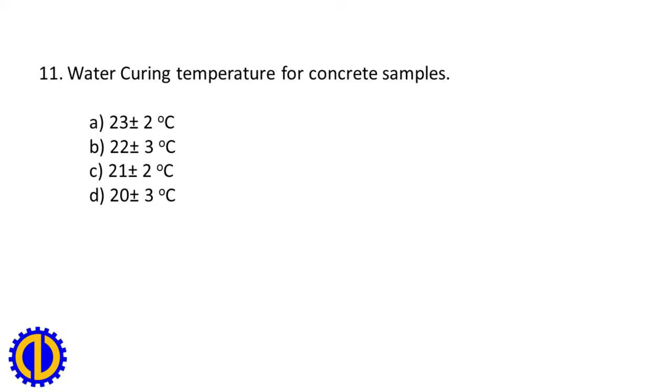11. Water curing temperature for concrete samples. A. 23 ± 2 degrees Celsius. B. 22 ± 3 degrees Celsius. C. 21 ± 2 degrees Celsius. D. 20 ± 3 degrees Celsius. Answer: A. 23 ± 2 degrees Celsius. Reference, AASHTO T23.

12. Condition of concrete during compression test. A. Dry. B. Moist. C. Wet. D. Any of the above. Answer: B. Moist. Reference, AASHTO T22.

13. Specimen tested at 28 days shall be broken within the permissible time tolerance of blank. A. 8 hours. B. 12 hours. C. 20 hours. D. 24 hours. Answer: C. 20 hours. Reference, AASHTO T22.

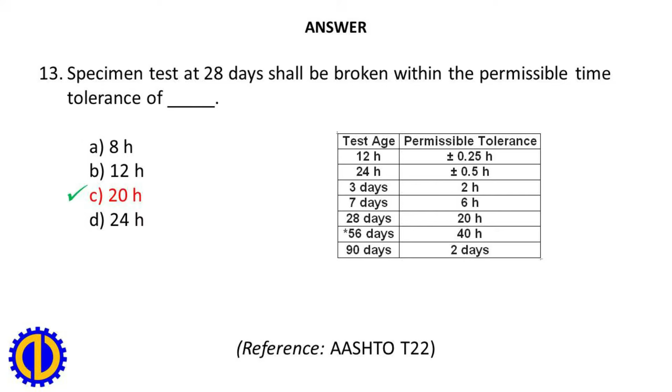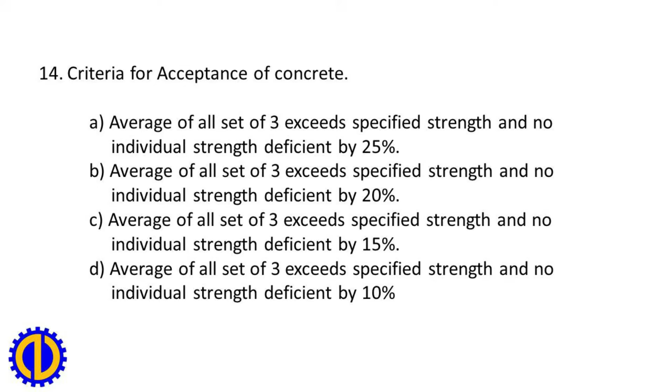14. Criteria for acceptance of concrete. A. Average of all sets of 3 exceeds specified strength and no individual strength deficient by 25%. B. By 20%. C. By 15%. D. By 10%. Answer: C. Average of all sets of 3 exceeds specified strength and no individual strength deficient by 15%. Reference, Blue Book 2013, Item 311.3.20.

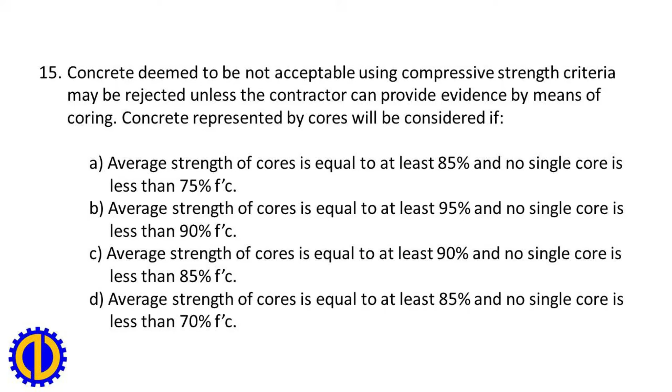15. Concrete deemed to be not acceptable using compressive strength criteria may be rejected unless the contractor can provide evidence by means of coring. Concrete represented by cores will be considered if: A. Average strength of cores is equal to at least 85% and no single core is less than 75% f'c. B. At least 95% and no single core less than 90% f'c. C. At least 90% and no single core less than 85% f'c. D. At least 85% and no single core less than 70% f'c. Answer: A. Average strength of cores is equal to at least 85% and no single core is less than 75% f'c. Reference, Blue Book 2013, Item 311.3.20.

16. Truck mixer mixing speed shall be within blank. A. 4 to 6 revolutions per minute. B. 3 to 6 revolutions per minute. C. 2 to 6 revolutions per minute. D. 3 to 5 revolutions per minute. Answer: A. 4 to 6 revolutions per minute. Reference, Blue Book 2013, Item 405.4.4.

17. Maximum drop height of placing concrete mixture shall be blank. A. 1 meter. B. 1.5 meters. C. 2 meters. D. 3 meters. Answer: B. 1.5 meters. Reference, Simplified Construction Handbook, DPWH 2014.

18. Pre-stressed concrete requires the use of class blank concrete. A. C. B. P. C. B. D. A.

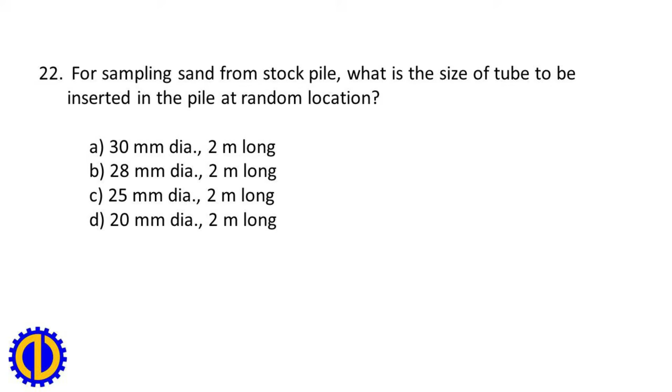22. For sampling sand from stockpile, what is the size of tube to be inserted in the pile at random location? A, 30 mm diameter, 2 meters long. B, 28 mm diameter, 2 meters long. C, 25 mm diameter, 2 meters long. D, 20 mm diameter, 2 meters long. Answer: A, 30 mm diameter, 2 meters long. Reference, AASHTO T2: approximately 30 mm minimum diameter by 2 meters minimum length may be inserted at minimum 5 increments.

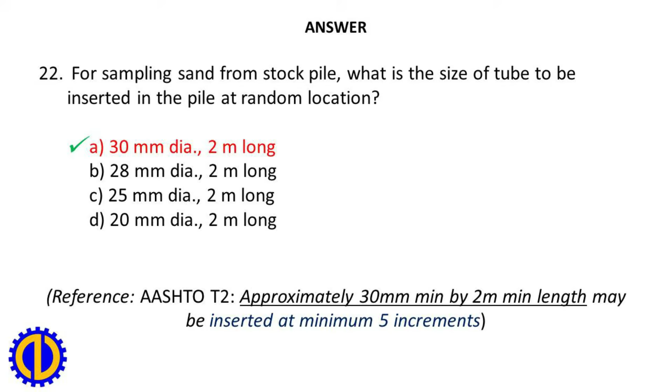23. What is the unit weight of steel? A, 7,900 kilograms per cubic meter. B, 7,800 kilograms per cubic meter. C, 7,850 kilograms per cubic meter. D, 8,000 kilograms per cubic meter. Answer: C, 7,850 kilograms per cubic meter. Reference, ASTM A36.

24. What is the unit mass of a 10 mm diameter RSB? A, 0.628 kilograms. B, 0.617 kilograms. C, 0.820 kilograms. D, 0.817 kilograms. Answer: B, 0.617 kilograms. Calculate unit mass using the formula diameter squared divided by 162.2.

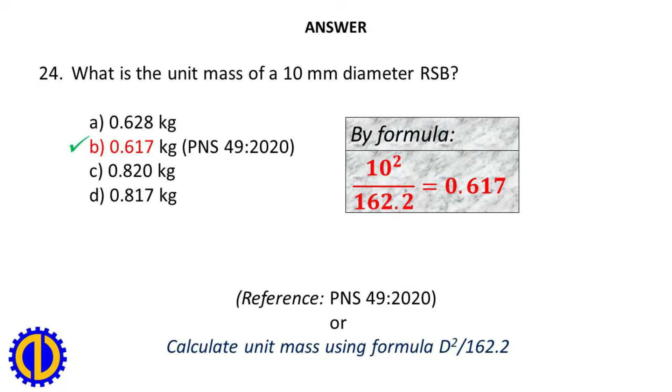25. What is the nominal weight of a 16 mm diameter by 6 meter length RSB? A, 9.468 kilograms. B, 9.909 kilograms. C, 9.280 kilograms. D, 9.017 kilograms. Answer: A, 9.468 kilograms. Calculate using the formula diameter squared divided by 162.2 times length.

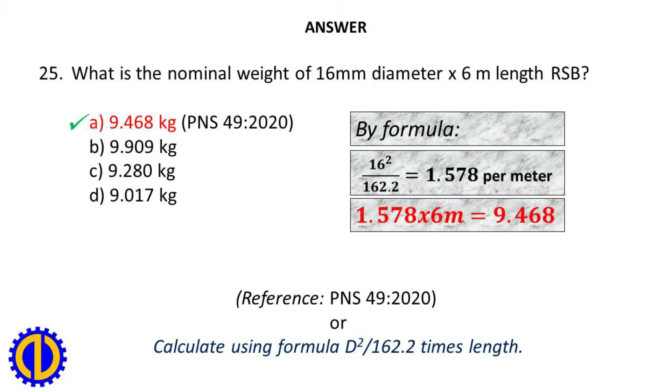26. What is the maximum permissible variation in actual weight of a steel bar from the theoretical weight? A, plus or minus 6%. B, plus or minus 7%. C, plus or minus 8%. D, plus or minus 9%. Answer: A, plus or minus 6%. Reference, PNS 49, 2020.

27. You are an experienced material engineer of your firm. During compaction you found out that the soil is too wet. What economical recommendation will you give? A, reject the soil. B, remove and replace the soil. C, continuous compaction. D, scarify and dry the soil by exposing it to air under suitable conditions. Answer: D. Scarify means to break up, loosen or roughen the surface. Resource, Merriam-Webster.

28. Clays when removed from the borrow pits come out in the form of chunks. If you are the assigned material engineer in the field, what is the most suitable compacting equipment you will recommend? A, tandem roller. B, vibratory roller. C, pneumatic tired roller. D, sheep's foot roller. Answer: D, sheep's foot roller. Sheep's foot rollers are most effective in breaking chunks. Reference, civilblog.org, Compaction of clays.

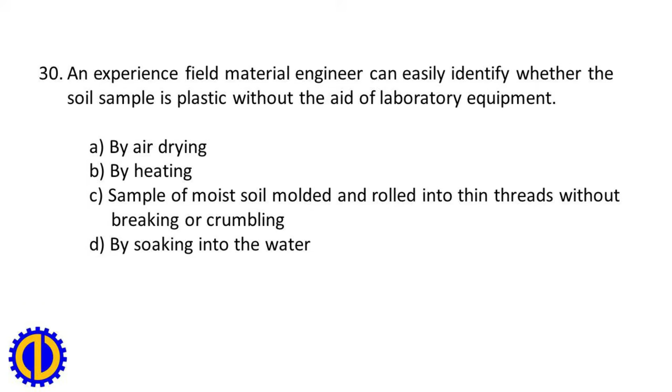30. An experienced field material engineer can easily identify whether the soil sample is plastic without the aid of laboratory equipment. A, by air drying. B, by heating. C, a sample of moist soil molded and rolled into thin threads without breaking or crumbling. D, by soaking into the water. Answer: C.

31. What is the estimated diameter of the soil thread, when rolled between the palm of the hand and the glass plate, when it begins to crumble in plastic limit determination? A, 1/4 inch. B, 1/8 inch. C, 1/2 inch. D, 3/16 inch. Answer: B, 1/8 inch. Reference, AASHTO T90, Determination of Plastic Limit and Plasticity Index.

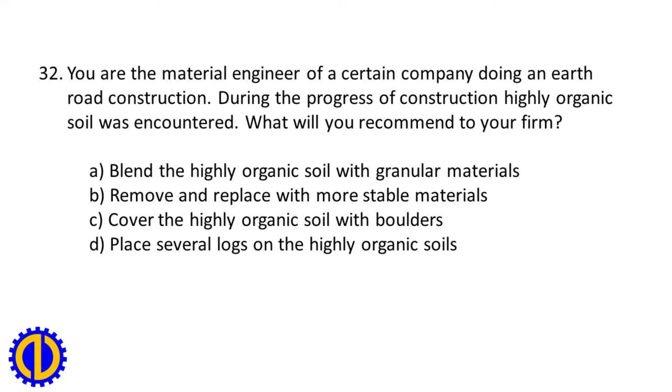32. You are the material engineer of a certain company doing an earth road construction. During the progress of construction, highly organic soil was encountered. What will you recommend to your firm? A, blend the highly organic soil with granular materials. B, remove and replace with more stable materials. C, cover the highly organic soil with boulders. D, place several logs on the highly organic soils. Answer: B, remove and replace with more stable materials. Reference, DPWH Blue Book Item 104.2. Organic soils such as peat and muck are unsuitable material.

33. You are the materials engineer of your firm. It so happened that in the preparation of the as-staked plans it was found out that there was an increase and new additional items of work from the original quality control program submitted. A, maintain the old submitted quality control program. B, revise the quality control program. C, delete the increase and the new additional item. D, any of the above.

B. Revise the quality control program.

34. If there is a strength deficiency in the concrete specimens and it is not feasible or not advisable to obtain cores from the structure due to structural considerations, as materials engineer, what will you recommend? A. Send letter to your superior for his decision. B. Recommend immediately adjusted price of payment with respect to the deficiency incurred. C. Both A and B. D. Tolerate the strength deficiency.

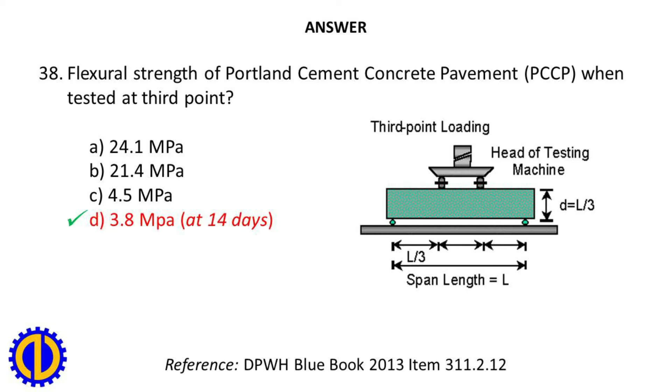39. What is the minimum required cement content per cubic meter of concrete to meet the minimum strength for Item 311 PCCP? A. 364 kilograms. B. 400 kilograms. C. 450 kilograms. D. 460 kilograms. A. 364 kilograms. Reference: DPWH Blue Book 2013 Item 311.2.12, at least 364 kilograms.

40. What is the maximum spacing for operating vibrators? A. 40 centimeters. B. 50 centimeters. C. 60 centimeters. D. 70 centimeters. C. 60 centimeters. Reference: DPWH DO 21 s. 2019 Section 311.3.2, Equipment.

41. In no case shall the vibrator be operated longer than blank seconds in one location. A. 3 seconds. B. 5 seconds. C. 7 seconds. D. 15 seconds. D. 15 seconds. Reference: DPWH Blue Book 2013 Item 311.3.9, Placing Concrete.

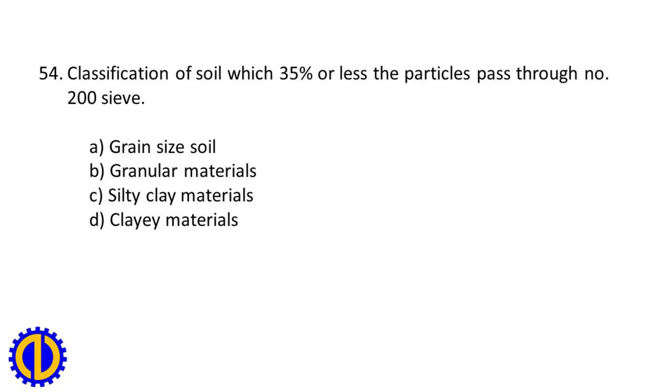54. Classification of soil which 35% or less of the particles pass through number 200 sieve. A. Grain size soil. B. Granular materials. C. Silty clay materials. D. Clayey materials. B. Granular materials. Reference, AASHTO M 145-91 Table 1.

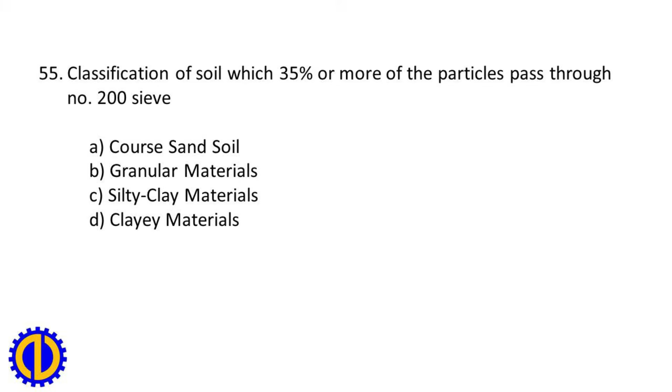55. Classification of soil which 35% or more of the particles pass through number 200 sieve. A. Coarse sand soil. B. Granular materials. C. Silty clay materials. D. Clayey materials. C. Silty clay materials. Reference, AASHTO M 145 and ASTM D3282.

56. The minimum penetration of the preservative into the surface of the timber shall be blank. A 15 mm. B 20 mm. C 25 mm. D 10 mm. B 20 mm. Reference, Blue Book 2013 Item 400.2.2 Treated Timber Piles.

57. How many hours do aggregates stockpile or bin for draining before being batched? A. 1 hour. B. 6 hours. C. 12 hours. D. 24 hours. C. 12 hours. Reference, DPWH Blue Book 2013 Item 405.4.3 Batching.

58. Cast-in-place concrete shall not be post-tensioned until at least blank and until the compressive strength has reached the strength specified. A. 7 days. B. 10 days. C. 14 days. D. 20 days. B. 10 days. Reference, Blue Book 2013 Item 406.3.10 Post-tensioning.

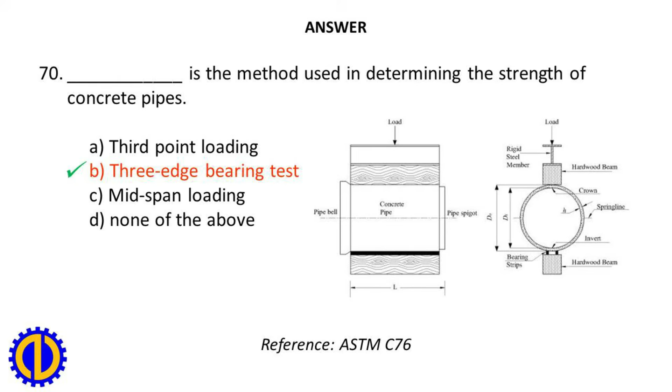71. If an asphalt pavement will be constructed over an old existing concrete pavement, blank should be applied to the concrete pavement. A. Seal coat. B. Tack coat. C. Prime coat. D. Mortar coat. Answer: B. Tack coat. Reference, Blue Book 2013, Item 302, Bituminous tack coat.

72. Coarse aggregate for bituminous macadam pavement should be blank. A. Crushed gravel or crushed stone. B. Natural gravel. C. Both A and B. D. None of the above. Answer: A. Crushed gravel or crushed stone. Reference, Blue Book 2013, Item 305, Bituminous penetration macadam pavement, 305.2.3 aggregate.

73. Unless otherwise specified in the special provision, the type of Portland cement used in paving concrete shall be blank. A. Type 3. B. Type 2. C. Type 4. D. Type 1. Answer: D. Type 1. Reference, Blue Book 2013, Item 311.2.1, Portland cement.

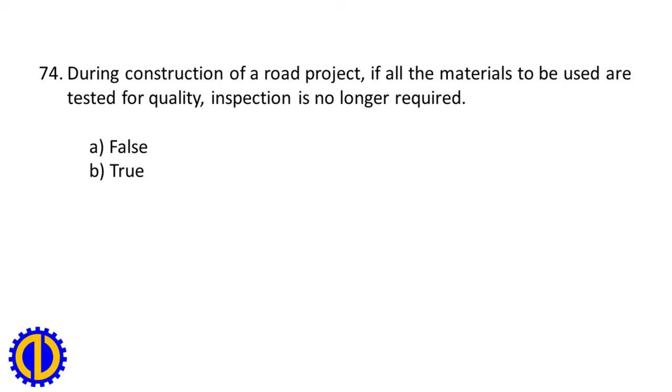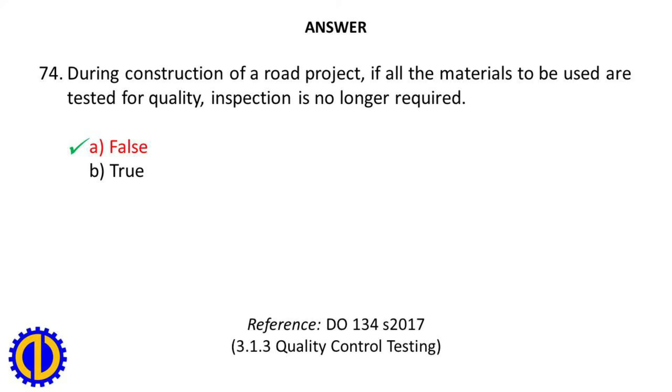74. During construction of a road project, if all the materials to be used are tested for quality, inspection is no longer required. A. False. B. True. Answer: A. False. Reference, DO 134 S 2017, 3.1.3 Quality Control Testing.

75. The degree of compaction of an embankment in our present specification is based on blank. A. Unconfined compression test. B. AASHTO T180. C. Bulk specific gravity. D. CBR method. Answer: B. AASHTO T180. Reference, Blue Book 2013, Item 104.3.3, Compaction of Earth, AASHTO T180 Moisture Density Relation.

76. A soil with a group index of 5 is stronger than another with a group index of 10. A. False. B. True. C. It depends on the water content. D. None of the above. Answer: B. True. Reference, AASHTO. Group index values near 0 indicate good soils, while values of 20 or more indicate very poor soils.

77. The typical material of this group is fine beach sand or fine desert blown sand without silty or clayey fines or with a very small amount of non-plastic silt. A. Group A-1. B. Group A-3. C. Group A-5. D. Group A-7. Answer: B. Group A-3. Reference, AASHTO Soil Classification. Group A-3: the typical material of this group is fine beach sand or fine desert blown sand without silty or clayey fines or with a small amount of non-plastic silt.

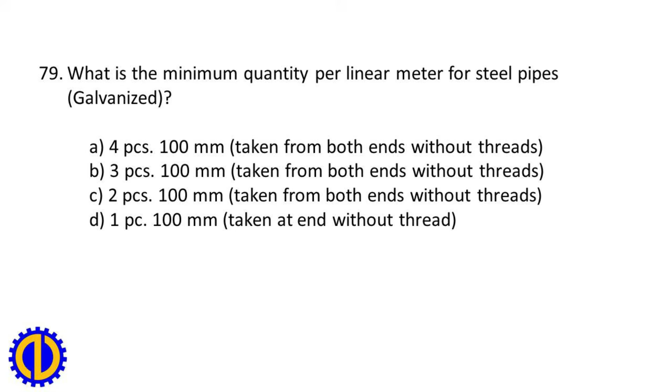79. What is the minimum quantity per linear meter for steel pipes, galvanized? A. 4 pieces 100 mm taken from both ends without threads. B. 3 pieces 100 mm taken from both ends without threads. C. 2 pieces 100 mm taken from both ends without threads. D. 1 piece 100 mm taken at end without thread. Answer: C. 2 pieces 100 mm taken from both ends without threads. Reference, DPWH minimum testing requirement for the submission of samples.

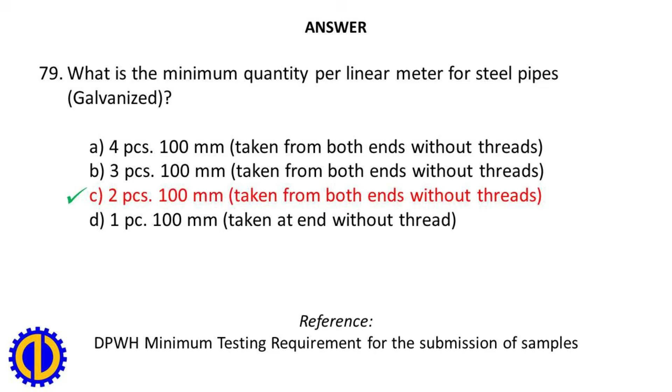80. A sample from a bituminous mix weighs 1,000 grams. At extraction, it was found out that the dry aggregate weighed 950 grams. What is the percent of asphalt by weight of mix? A. 5.2%. B. 5.0%. C. 5.4%. D. 4.8%. Answer: B. 5.0%. Solution: (1000 minus 950) divided by 1000 times 100 equals 5.0%.

81. The contractor shall submit in writing a job mix formula for the mixture supported by laboratory test data along with samples of sources of components and viscosity temperature relationships to the engineer for testing and approval at least blank. A. 2 weeks. B. 3 weeks. C. 1 week. D. 4 weeks. Answer: B. 3 weeks. Reference, DO 21 S 2019 Item 307, Bituminous Plant Mix Surface Course, General.

82. The penetration test is an indication of the blank of asphalt. A. Consistency. B. Softness. C. Hardness. D. Flash point. Answer: A. Consistency. Reference, DPWH Laboratory Manual Volume 2, Determination of penetration of bituminous materials, Significance of test.

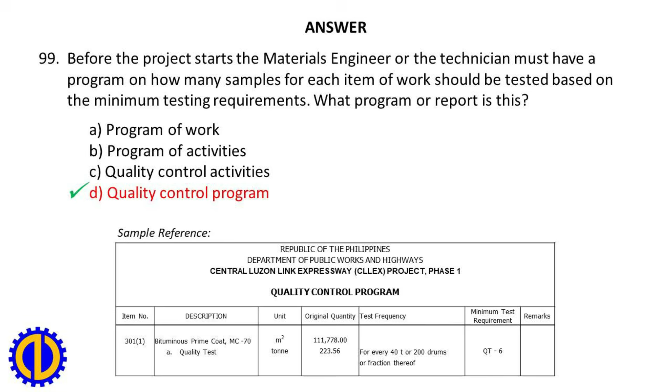99. Before the project starts, the materials engineer or the technician must have a program on how many samples for each item of work should be tested based on the minimum testing requirements. What program or report is this? A. Program of work. B. Program of activities. C. Quality control activities. D. Quality control program. D. Quality control program.

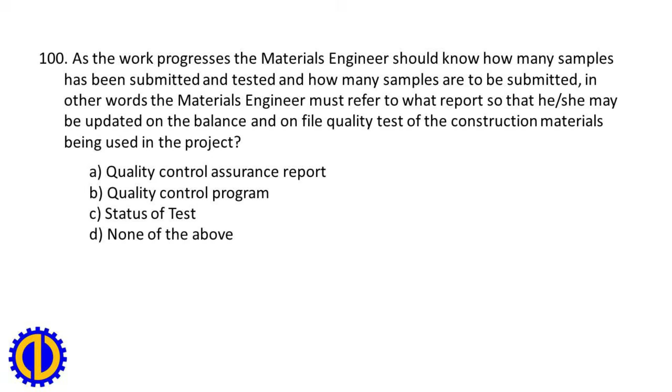100. As the work progresses, the materials engineer should know how many samples have been submitted and tested and how many samples are to be submitted. In other words, the materials engineer must refer to what report so that he or she may be updated on the balance and on-file quality test of the construction materials being used in the project. A. Quality Control Assurance Report. B. Quality Control Program. C. Status of test. D. None of the above. C. Status of test.